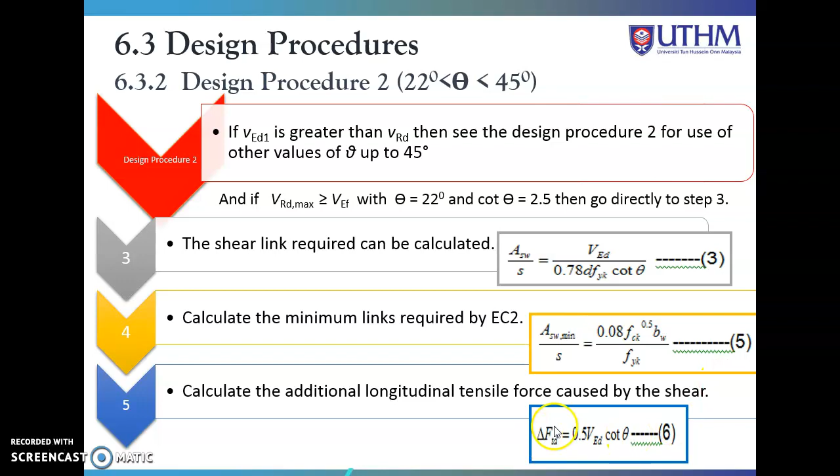So AS min. So ni adalah ASW, area over spacing. So this one is the minimum link required, okay, by using this equation. Then lastly, we need to calculate the additional longitudinal tensile forces caused by the shear by using this equation.

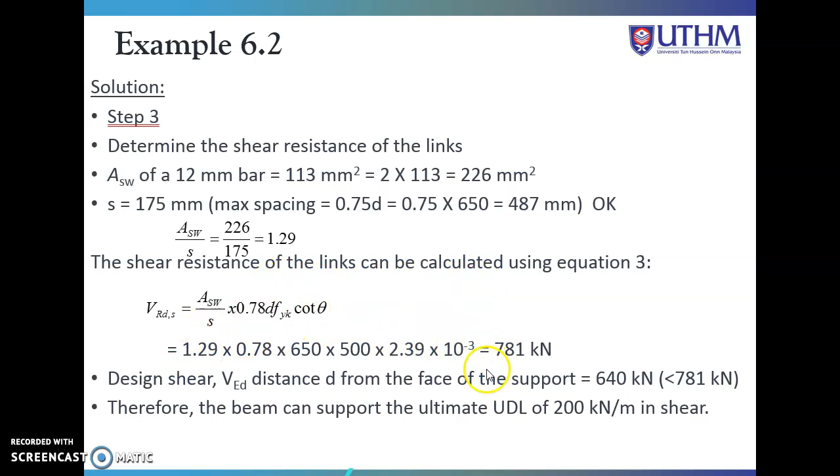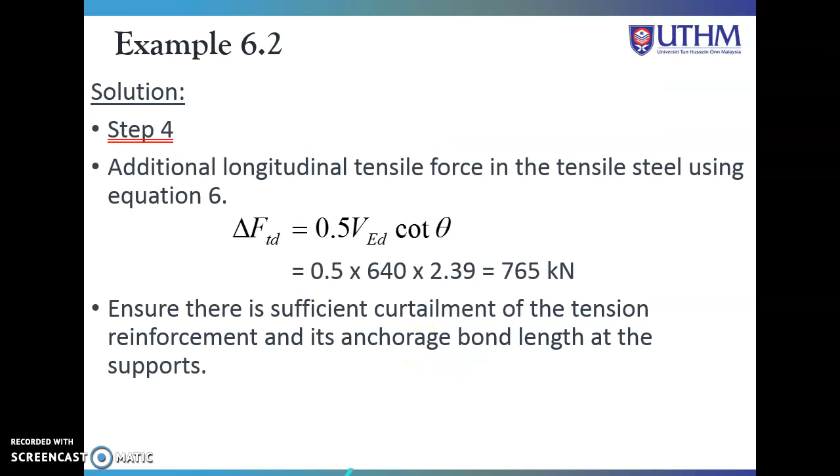Alright, I think that's all for the design procedure 2, and I leave it to you guys to try to solve this problem from what we learned in today's video.